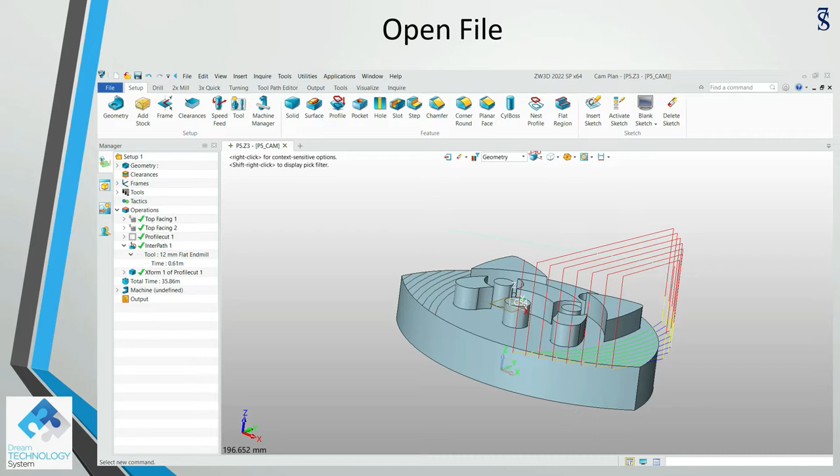Using the sketch, select the plane, then click OK. Use the offset function, set the dimension to 6.5 mm, copy the two curves, OK. We need to do this again one more time, set to 0, copy another two curves as displayed, click OK.

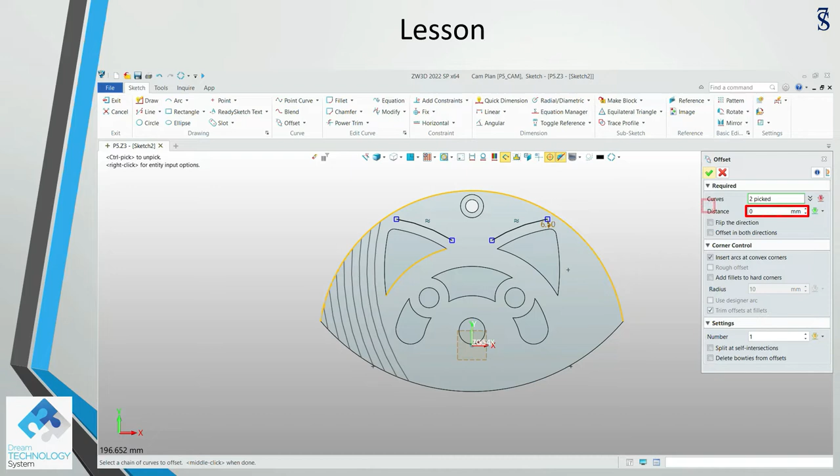With that, we use a trim and extend function. We need to extend the curve so that we can create our two paths. And continue with power trim. We need to trim away and make it look nice as a cutting curve.

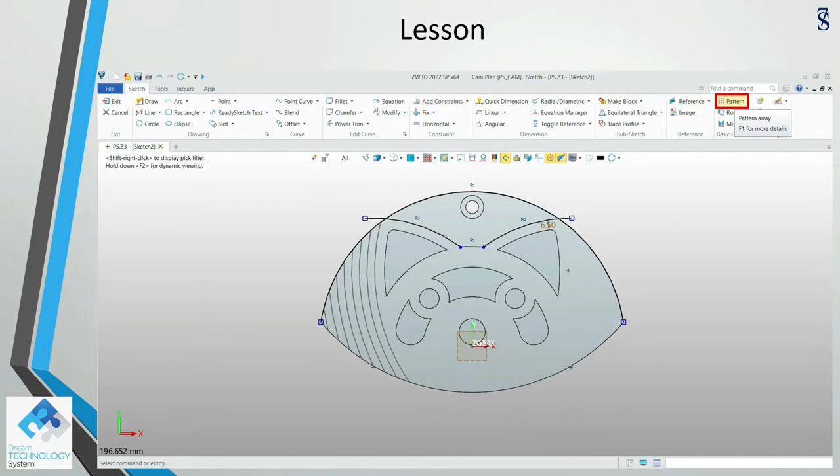Using the pattern, a new one that we're going to share with you today. Rectangle. We need to have 7 elements and a distance of 5 mm each. Click OK.

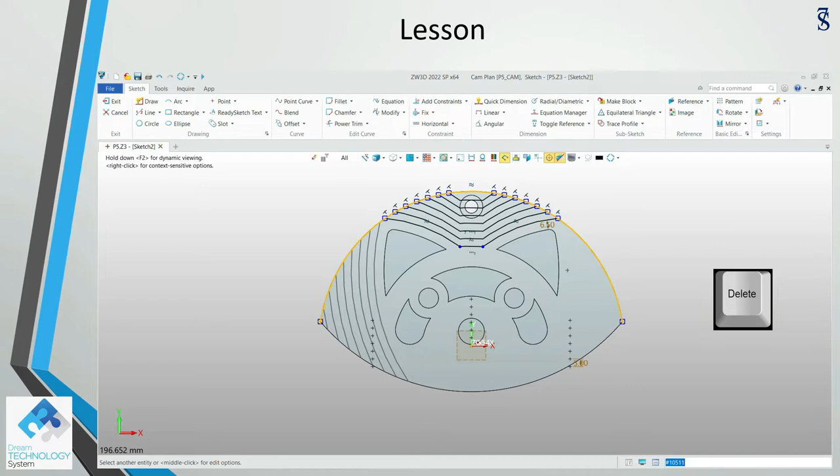Use the power trim and delete away the last curve that displays on the screen. Exit. Let us duplicate the previous operation, meaning to say at the left side.

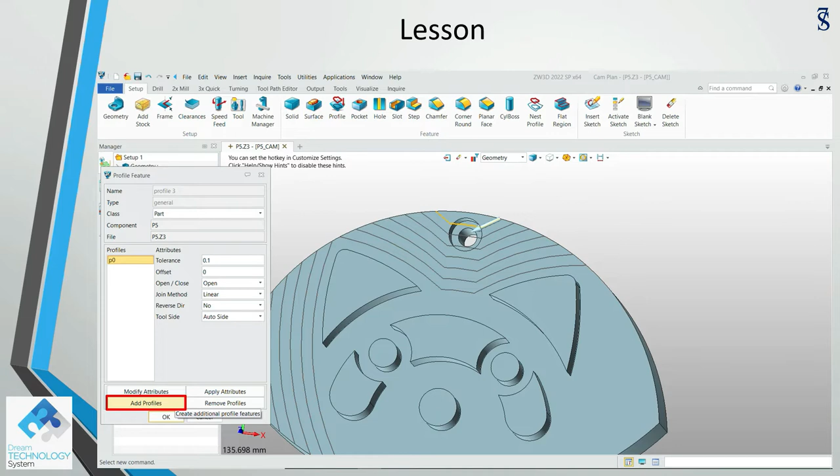Remove the curves. We need to add the profile. Create profile and click OK. Select the 3 curves, click OK. Continue to add profile until the last one, click OK.

Right mouse click, edit. We need to update certain parameters. The only one we need to change is the color. Calculate.

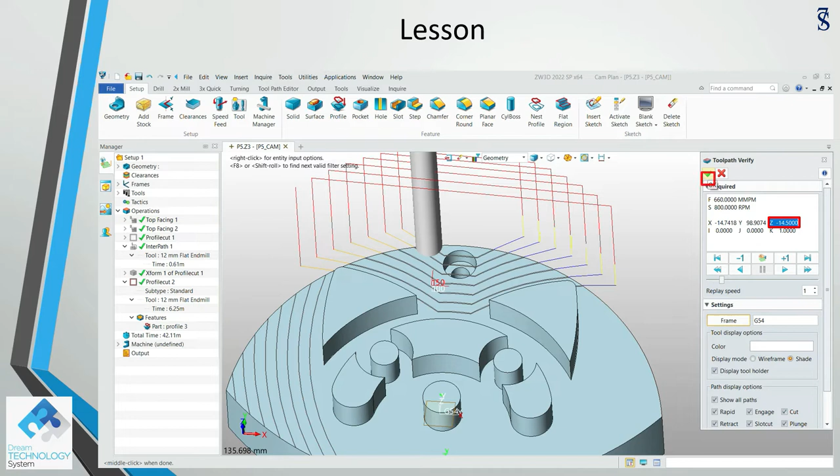You can see we drag after we set the G54. Z minus 14.5 and we click OK.

OK, let us do a solid verify. Looks good. Analysis. We still have material for finishing. We save the file. Let me switch the screen to show you step by step how to complete the task.

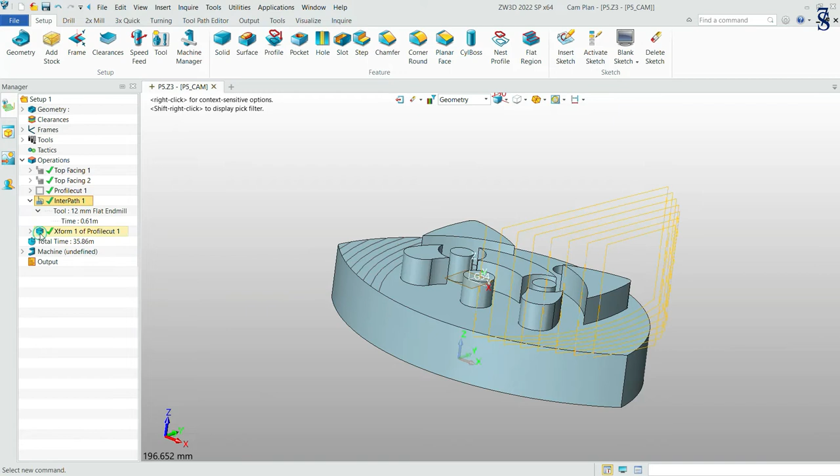Hello, welcome back. Let me show you step by step how to complete the task. First, we double click the previous operation. Collapse it. Use the sketch. Select the plane. Click OK.

We need the offset function, set to 6.5. Select the curve, this one and this one. Click OK.

Offset again, set to 0. Select curve, this one and this one. OK.

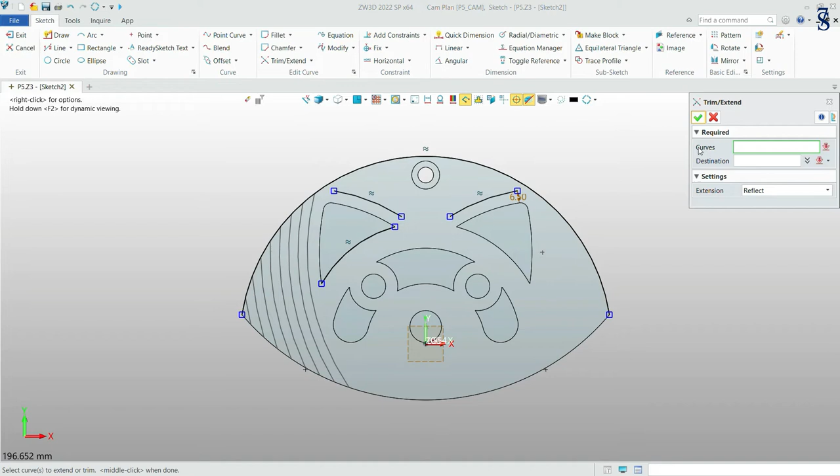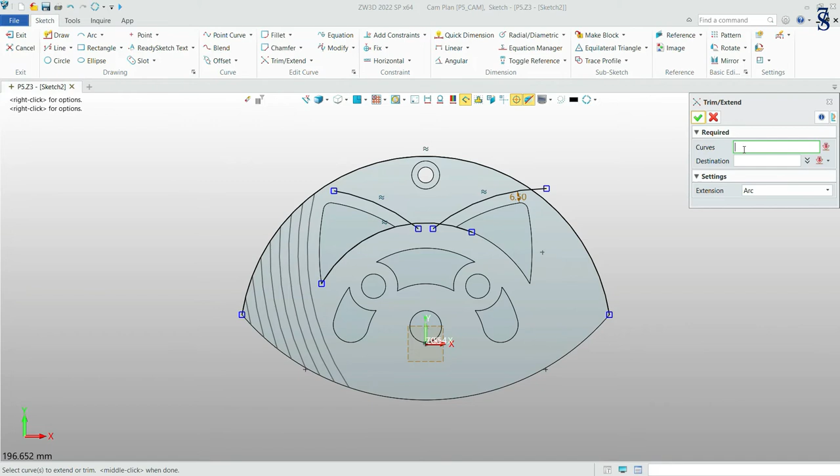Using the extend function. Select the curve, destination here. This one, destination here, this one, destination here. This curve, we will extend here. Last one.

Looks good. Okay, power trim. Remove all this away. Looks good. Let us go for pattern.

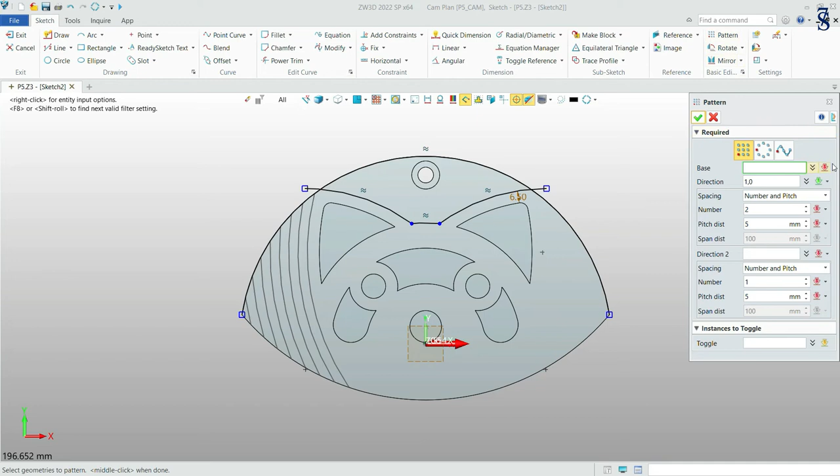Set the y-axis. 7 elements, this is 5. Looks good. Go for it. 1, 2, and 3.

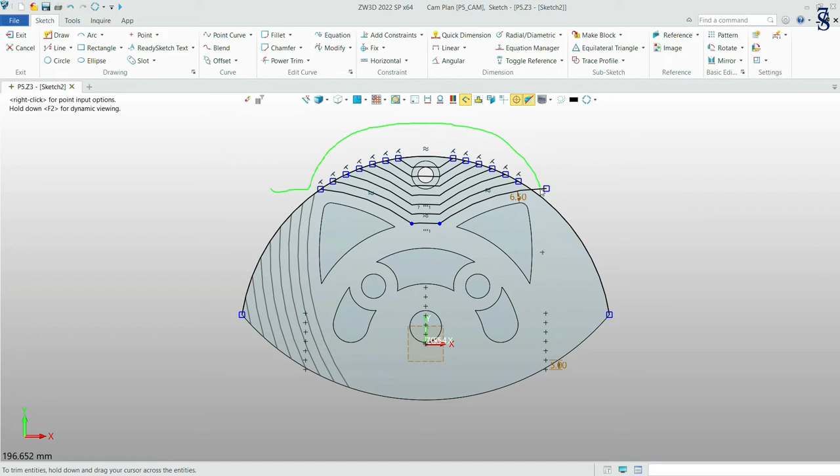Okay, use the power trim to trim away all this. Select the curve. Press delete. Exit. Done with the curves. So now we need to duplicate the operation.

Remove the previous curves profile. We need to create a new one. Add. Create. Profile. Okay, so let me tilt a little bit for easy selection. 1, 2, and 3. OK.

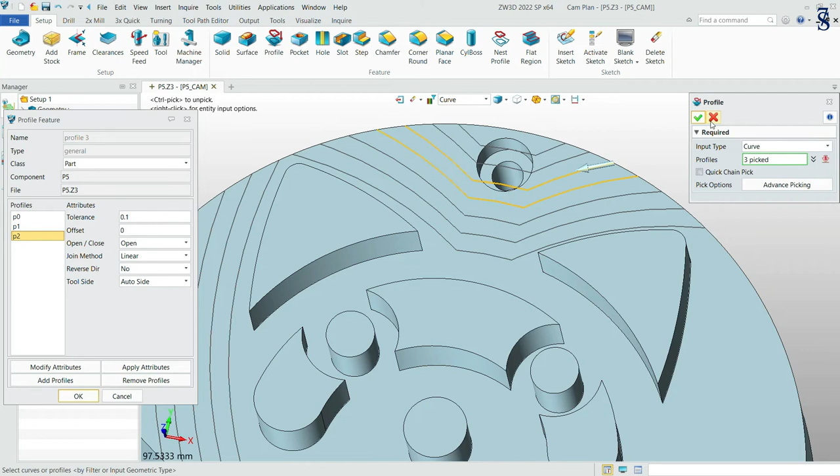Add profile. 1, 2, and 3. OK. Add profile. 1, 2, 3. OK. Add profile. 1, 2, 3. OK. Continue. Add profile. 1, 2, 3.

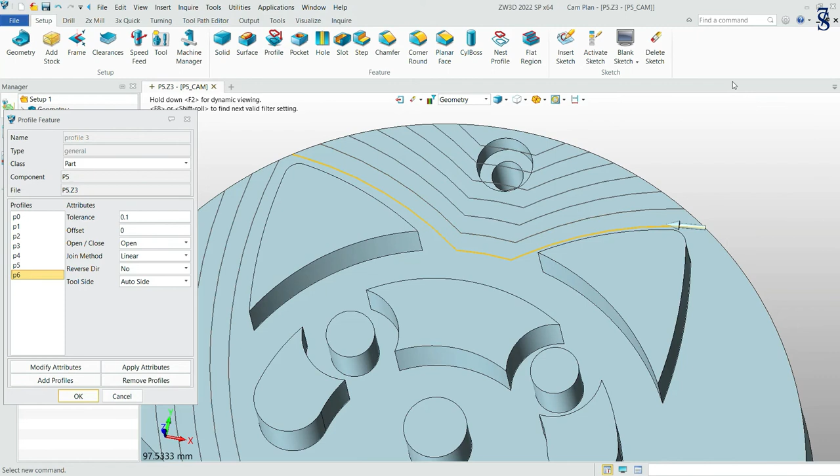OK. Add one more. 1, 2, 3. OK. Add 1, 2, 3. OK. Click OK. We have all the curves.

Right mouse click, edit. Nothing to change except the color. Change to this color. Calculate.

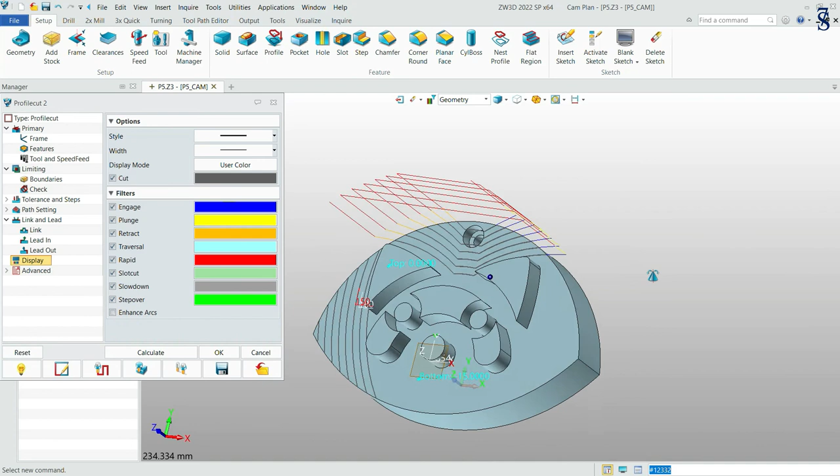Looks good. Let us verify. Set the frame, G54. Drag the 2. Z minus 14.5. Yes, this is what we expected.

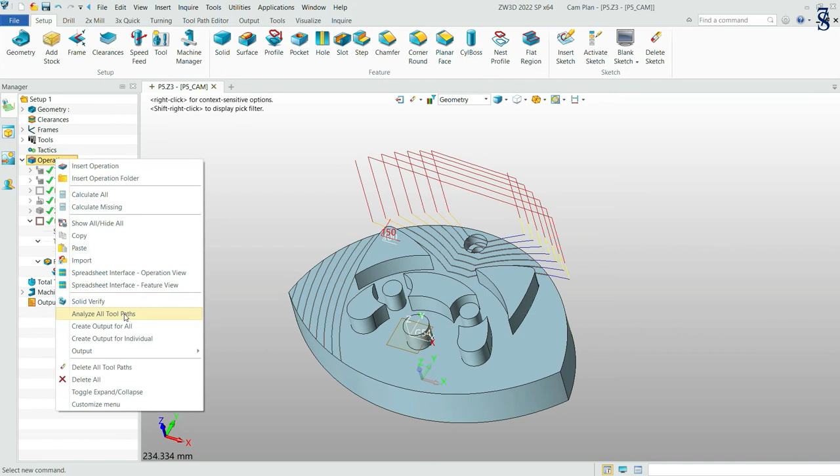OK, OK, let us do a solid verify. Reduce the speed. Play. Yeah, looking good. Options, analysis, visual.

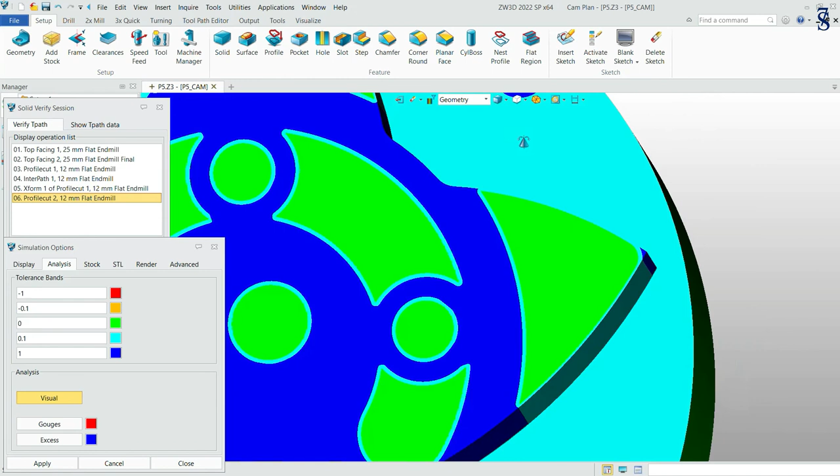Nice, we still have material to cut for finishing. You can see that on the other side as well. We actually cut into this curve area, but it's okay.